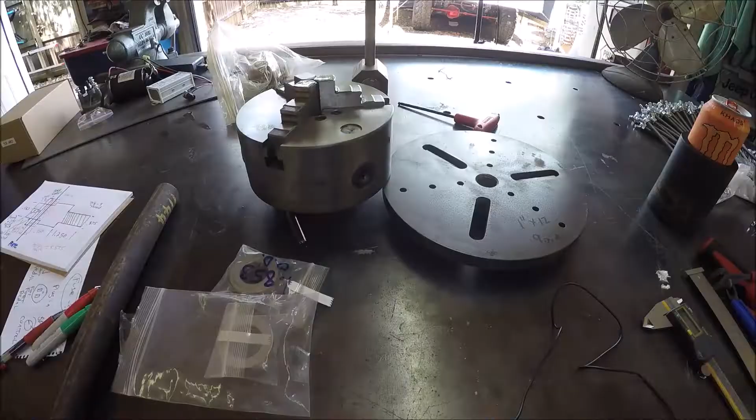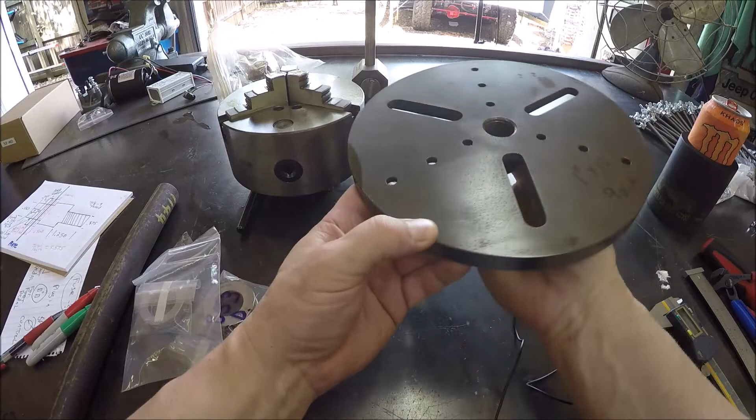So let me turn the camera around and show you our plan of attack. Okay, so we got a lot going on. It's probably going to be at least a 3 or 4 part video series, so this is going to be exciting. So my parts and pieces, picked up this faceplate. This will be basically our rotating table. This is a wood faceplate, but I couldn't find a cheap one for a metal lathe, so it goes on a wood lathe. The threads are 7/8-9, so that'll be our base.

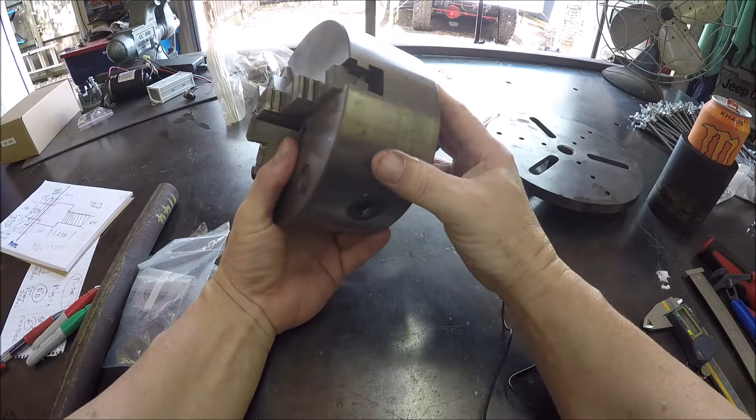And here's a 6-inch 3-jaw that was on my Enco lathe, which I took off and put a nice 8-inch 3-jaw, so didn't have to buy one. So that will go on to that. We'll have to make a plate to go from here to here to bolt on, or I may be able to bolt on straight through. I'm not sure yet, hadn't decided on the plan of attack for that.

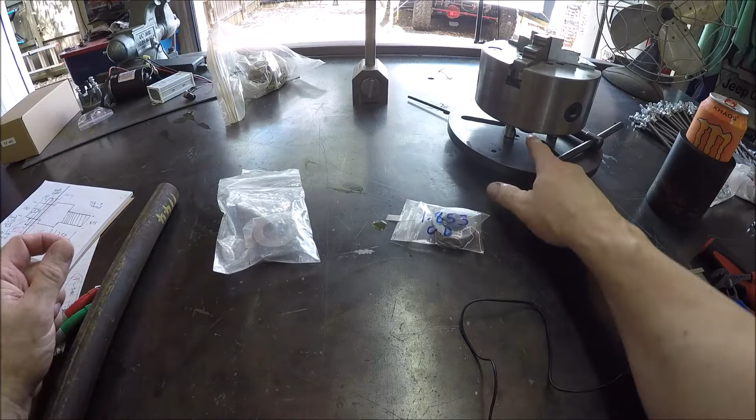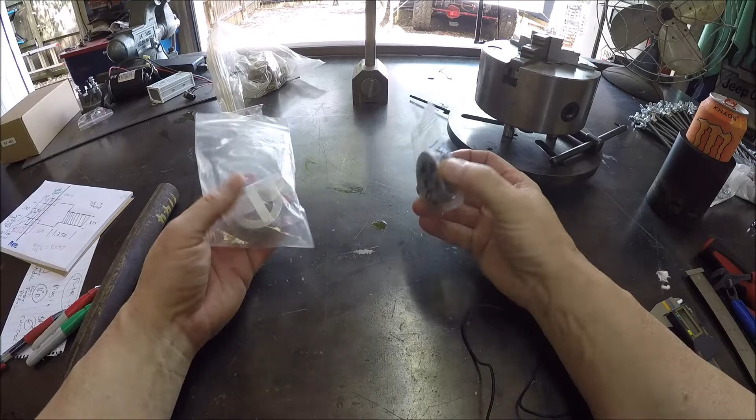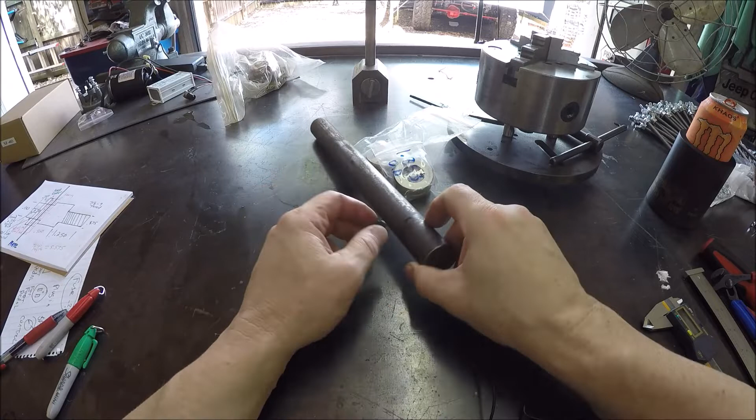And let's see, we got some bearings. So a rod, or should we say shaft, that we make, that will be bolted to the bottom of the faceplate. Then we'll have to have the bearings, and we'll have to basically have shoulders on it, so the weight will ride on the bearings, not on the actual motor. And I've got a piece of stress-proof 1144, just a tad bit over an inch. So we'll turn that. That'll be the lathe work for the rod.

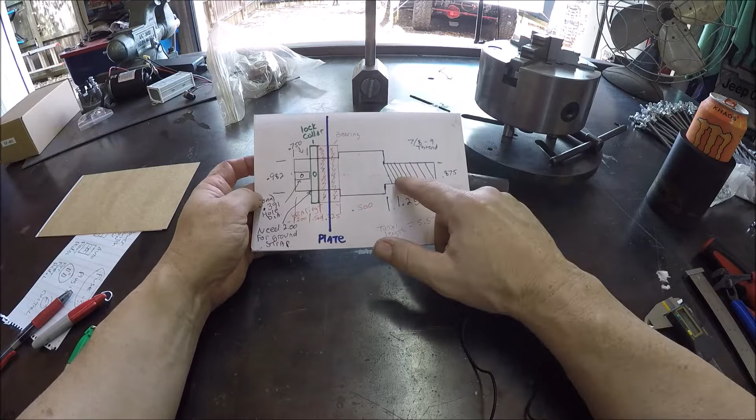And let me show you, I kind of got it laid out. We're going to build this shaft last, because I think some of these measurements may change, as in the overall length and the space of it, but this will kind of give you an idea. Cut a thread for the faceplate. This will be like the shoulder sitting on the bearing. Here is the piece of plate, which is going to be basically the shell for the actual rotary table that would go to the frame of it.

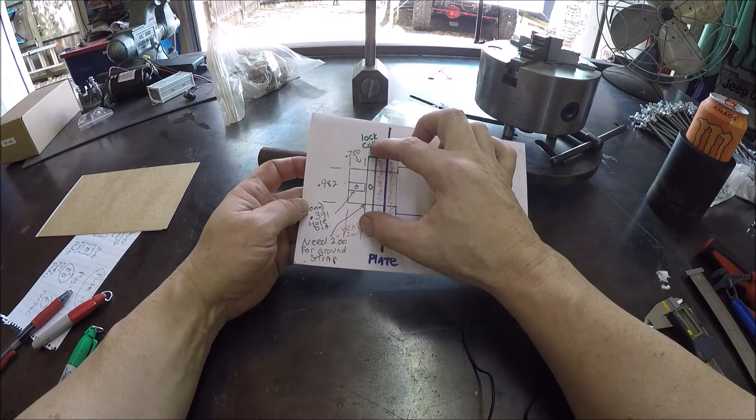Another bearing, some sort of lock collar, or I may actually make bearing housings for these two and then bolt them together, which is what I'm kind of leaning towards. And then this comes down the end of the shaft, and this is the part that's going to go onto the motor. I'll show you all the stuff over there.

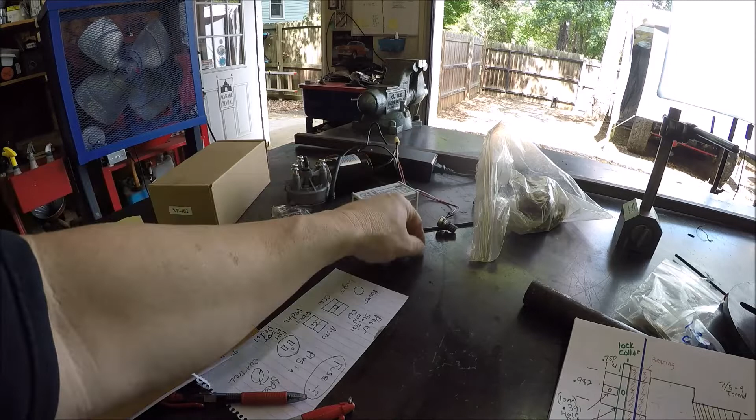So there's the big motor that I picked up. So that'll be the shaft right there. Speed controller, and I got an AC to DC converter. And then in here I've got the foot pedal. And then that's that piece of plate, and I've got 1x1 by 1/8 bar there to make a frame out of. And then we'll also need to make a panel, and this is kind of what I'm thinking.

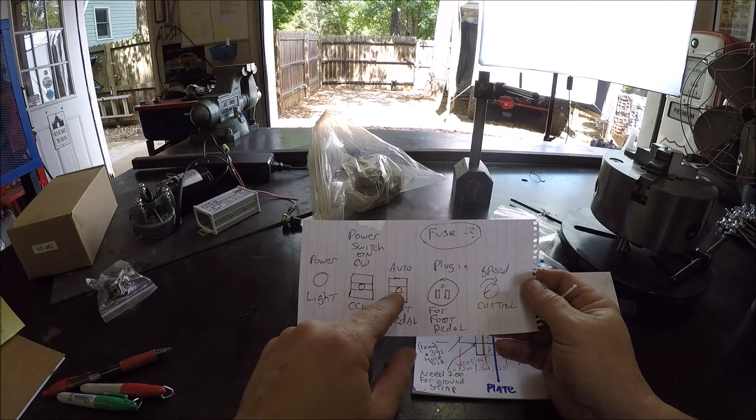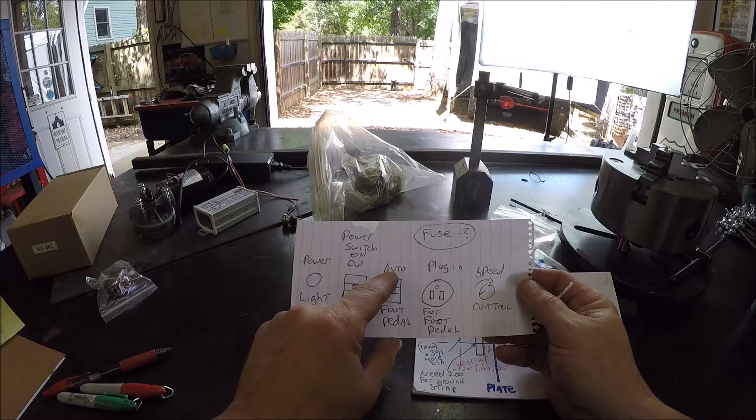A power light. This will be the power switch. This is what this one is here. It's a double pole, double throw. So you click it on, and then the motor will rotate clockwise, which makes the rotary table and the 3-jaw rotate clockwise, or we can flip it down and it'll rotate counterclockwise. Thinking about putting another switch in here, which would be probably a single pole double throw, so I can flip it up if I just don't want to use the foot pedal and have power going directly to it.

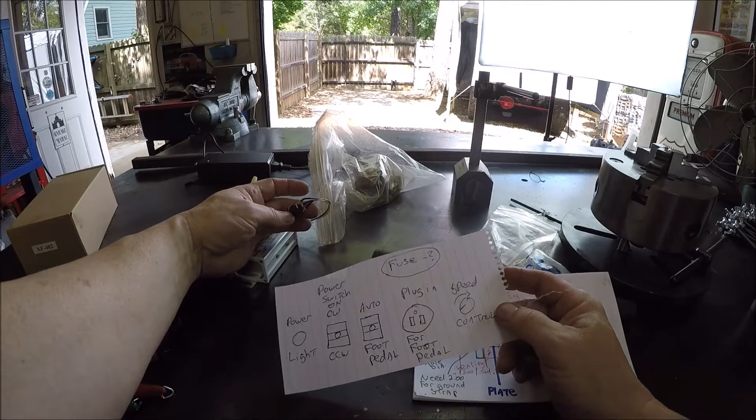And let's see here, slide everything over. You can see that is the potentiometer there, and that would be that. So increase it, speed control, and some sort of outlet so I can plug in the foot pedal, and then I can unplug it for storage. And I got a question mark of whether I want to put some sort of fuse in there.

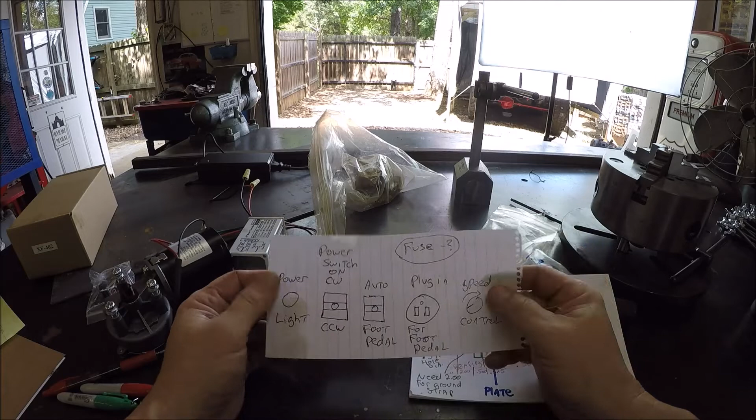So well, that'll take an episode building all that. So let me get this stuff kind of straightened up here, and we'll get a plan of attack. But I think probably what we'll do is we'll build us some housings for these bearings. What do you say?

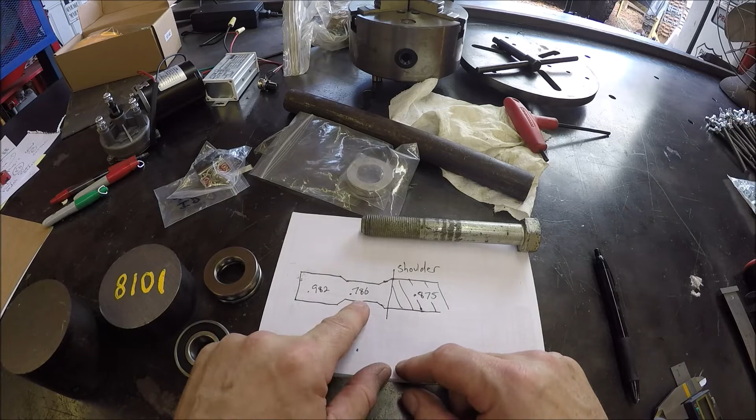So I've been trying to think of every possible scenario so we don't bozo this thing, and ran into a slight problem. We're just going to have to come up with another plan of attack. So what you're looking at, so if this is basically the shaft that we're going to build, the problem to run into is this small diameter here in between two large diameters. So what I'm trying to do is use the bearings that I got, and also I want this rotary table to be able to obviously sit flat or horizontal, and then I want to be able to turn it up to a vertical position.

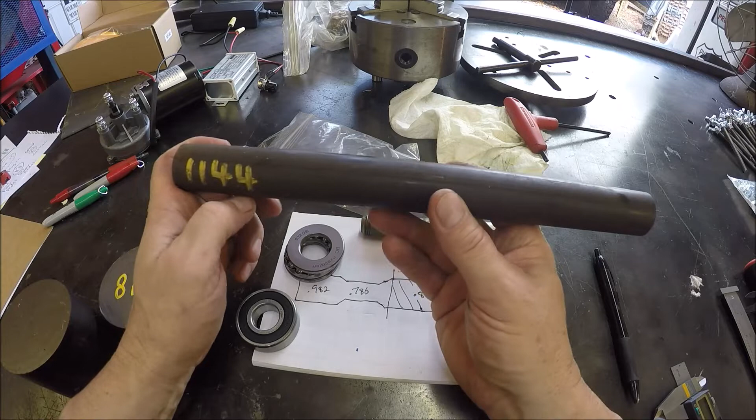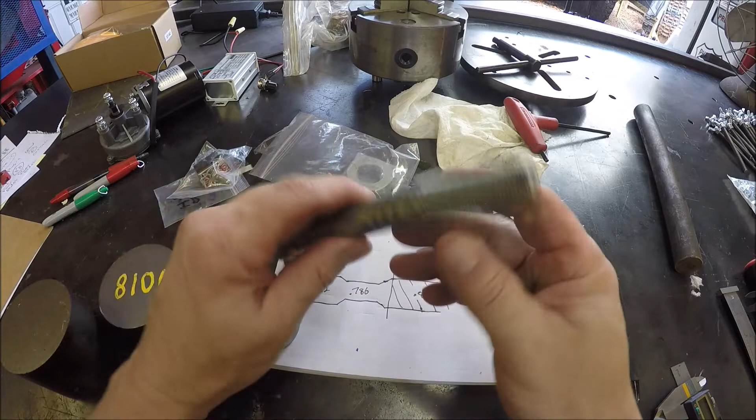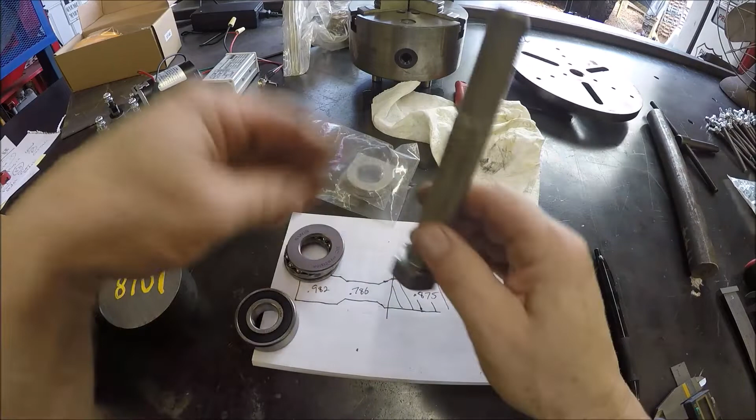So if I got this piece chucked up and we want to weld on the end of this, then we could do it that way, and it would work fine. Now the only problem is now we've got two different sets of forces we got to deal with. If let's say this was the shaft that is inside the rotary table, so if it's like this way, and for visual effects, let's say the face plate is sitting like this, so all the weight's pushing down. So this is the bearing that I want to use, so that's sitting down, and obviously this shaft would have basically a shoulder on it, and it'd be sitting on this bearing face, and so all the weight would rotate on this bearing, so that's fine.

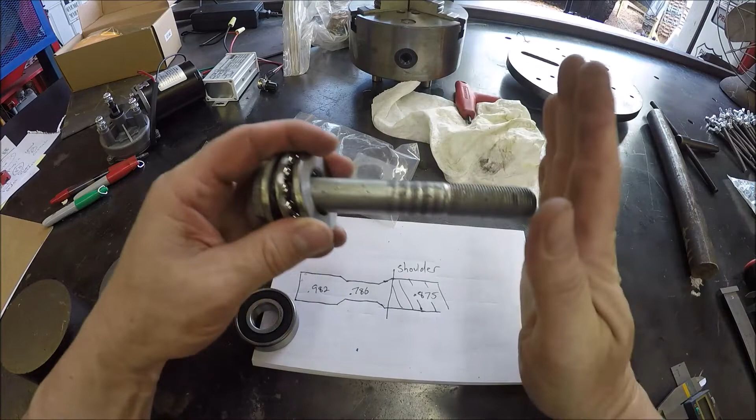Now the problem arises now when we rotate it to a vertical position, into a horizontal position. Obviously this is vertical, but I'm saying that the table is flat. Now the table is vertical, and this is horizontal, so now obviously this bearing isn't designed for this side load, it's designed to be on the face. So I want to use this bearing in here, and this would rotate this way on in the shaft, so it'd be fine. It would handle the weight, and life is good.

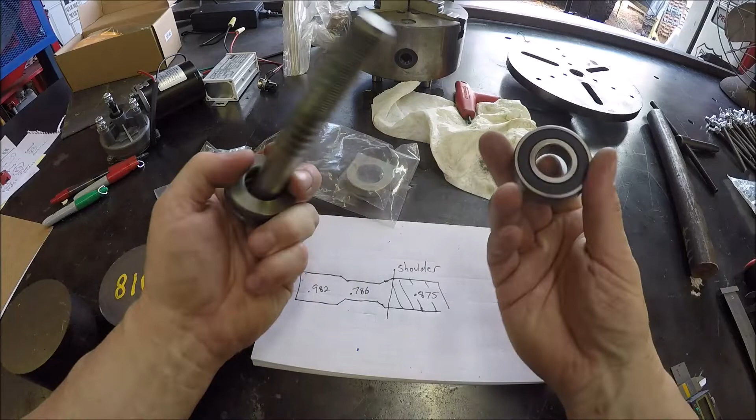But the problem is this ID is smaller than this ID, so you know you can't press this bearing on this way or this way because of the two larger diameters. So we may have to make this a two-piece shaft, either here or here, so we can get this bearing on. So let's make the housings, because these bearings need to be supported so they won't go anywhere and hold that load.

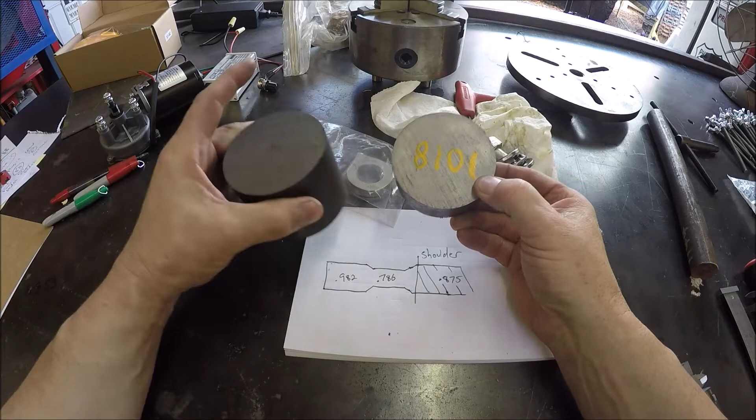So I dug in my bin, and I found a piece of 8101 and some mystery steel. Actually, just kidding, that's 1018 for you guys that don't get it.

And there's the phone, of course. Hang on.

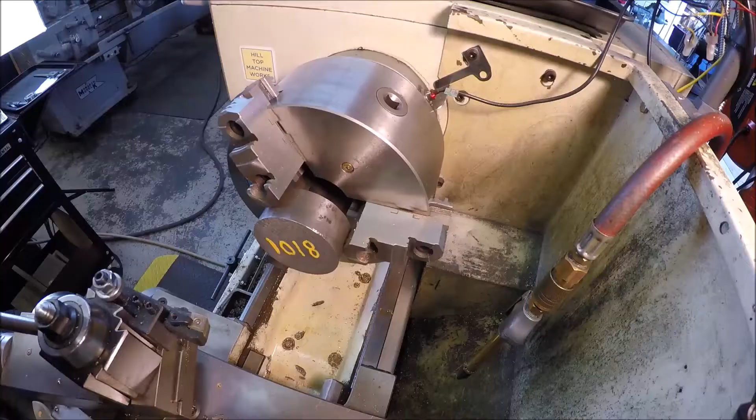Alright, I got my piece of 1018 chucked up in here. And we're going to go ahead and make a bearing housing for this one. So this is what we got to do. So let's get to it. Pretty simple. Clean the face up, drill a hole, and then we got to basically bore out a section for this bearing to slide into. So, easy breezy, lemon squeezy. I won't bore you with a lot of it. I'll just do a few things here and there. You've seen all this before.

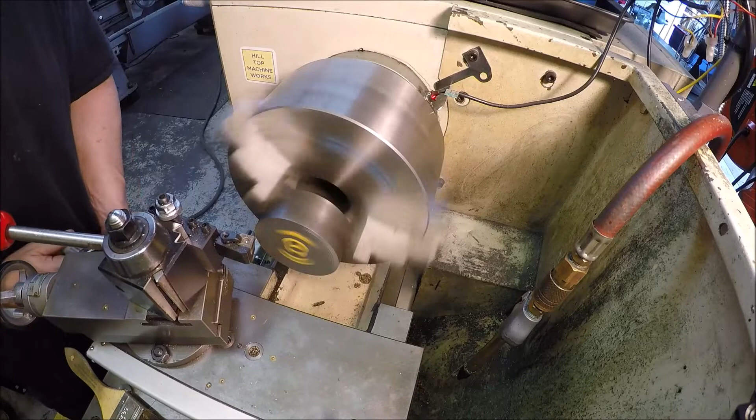Using my opposite corners on the CNMG here. Bore most of it out anyway, so. We ain't got to worry about a pretty finish right now. Just cleaning it up. See, we might have a small spot. Yeah, we're good. We'll go with that.

Let me get the drill bit in. Little center drill action. Use my new drill.

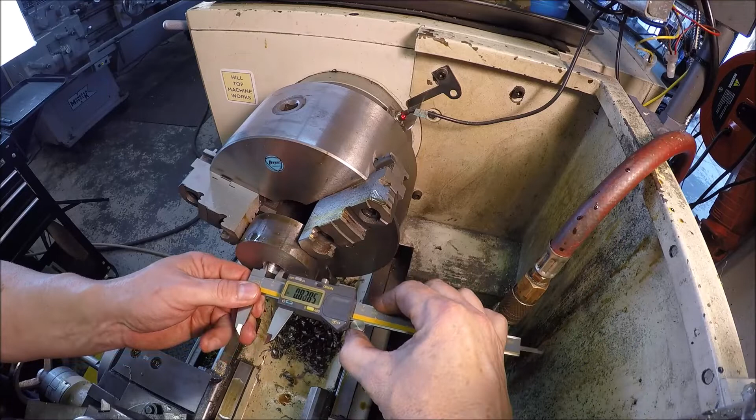At this stage of the game, we can use the guessometers. 8.30. All right. So we got a ways to go.

Well, I've been chewing away at it, as you can see, and we are almost there. I need about 1.5 thou. So that's going to be tough. I'm just actually going to try to do a spring pass just to clean it up. We'll see if that'll be what we hit. Back to where I was originally. That number there.

Alrighty. I hate taking such little cuts for carbide. The bearing doesn't have to be a press fit, and a slide fit would be okay, but I just don't want a sloppy fit, because it needs to be supported.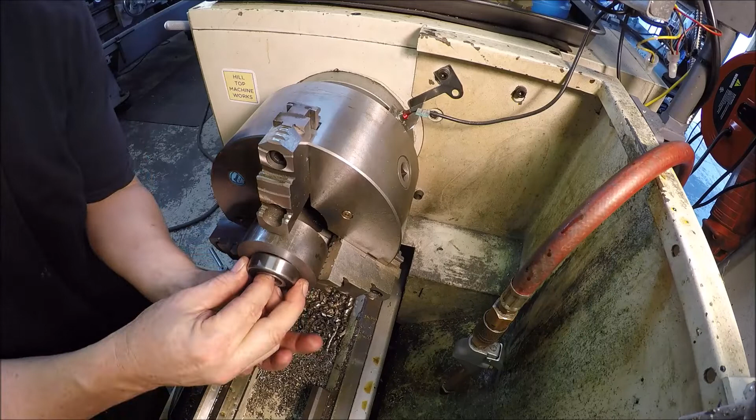But there you go, she's gonna go in. Kind of got to wiggle her in, so nice fit. Let's see if we can get her back out. So yay. We'll break this edge, flip around and cut some of that length down because we don't need that much. And this bearing support will be done.

Got it flipped around, just cleaning up this face. Just taking some meat off of it because it doesn't need to be as thick. Reduce the weight. Well, I just finished facing off about 3/8 of an inch. So it looks like we have us one bearing retainer. Cool.

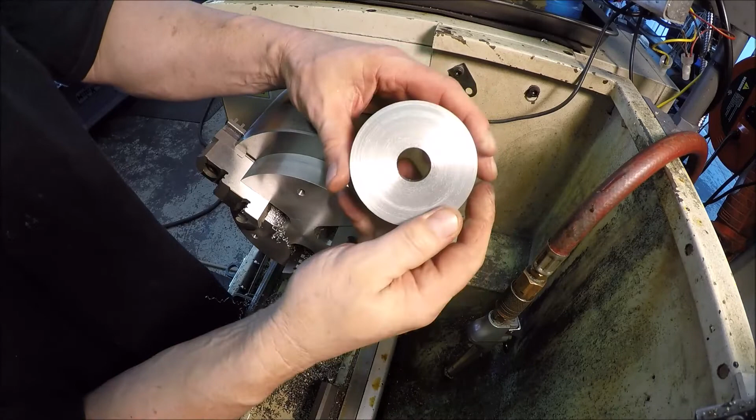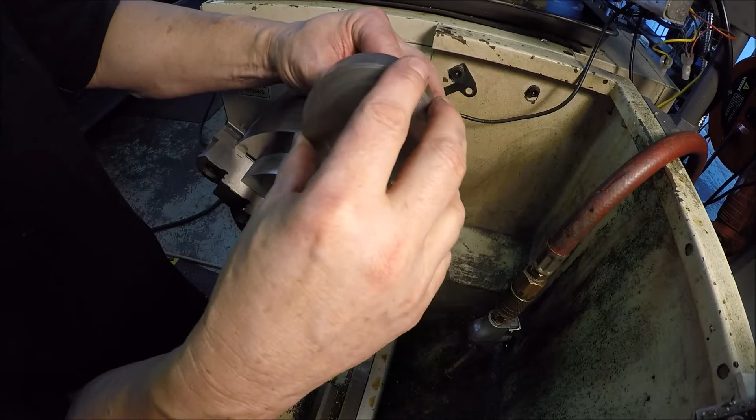Get it out. And obviously, you're not going to get a super good finish with 1018, but we're not needing a super duper finish for this. So here we go. Bearing's gonna fit in there, and I left it big because probably what's gonna happen is we're gonna drill a couple holes, and they're gonna have a couple screws go through there, and then that way it'll hold it on, and the bearing will be supported in this nice little housing.

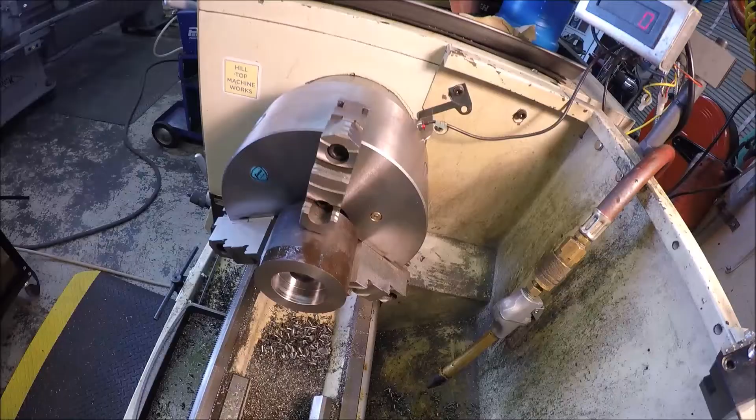I'm gonna break this edge, and then I'm gonna make the other one for the other bearing. I'll do that off camera, and we are a couple steps closer. Well, I'm wrapping up the second one. I just thought I'd show you the nice fit that we got on this second one. Gotta love it when the measurements come out just the way you want them, even with 1018. But look at that fit. Perfect. That's gonna work out nice. Cool. Alrighty, rocking and rolling, guys.

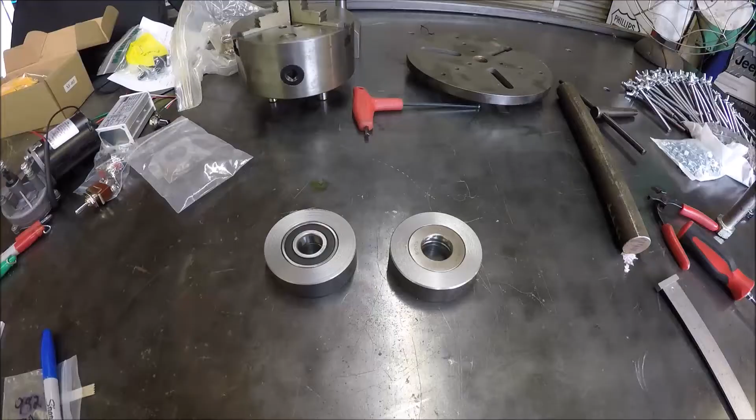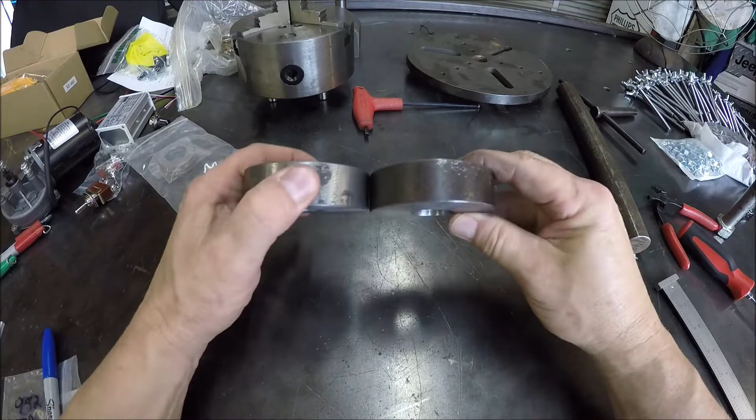Well, there you go, guys. We've got 2 bearing housings. Knocked this one out off camera. So they look good. They should work perfect for us. So I guess this is a good time to end this one. This will be part 1, and we'll pick up part 2 tomorrow, where we'll go ahead and start planning out the shaft and trying to kind of figure out how everything's going to go, so we only have to make it once and we don't have any boo-boos.